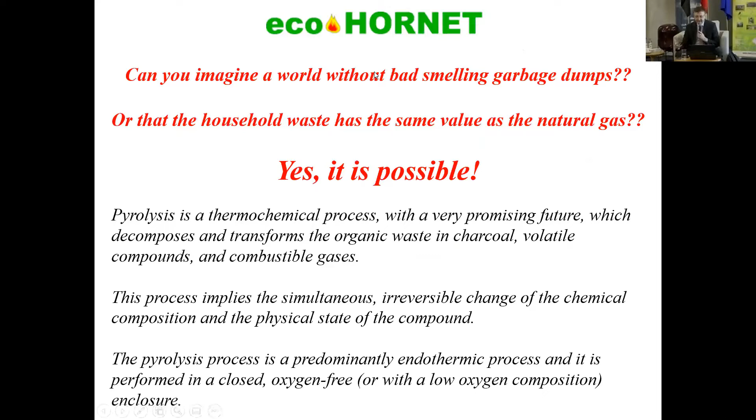So Mr. Hornets is an entrepreneur, but before that he's an inventor. He spent most of his time developing, engineering, and inventing new types of devices and systems. He was involved in the defense industry, and some of his patents are in this field. But after that, he started a business by himself, and together with his brother, he initiated activities dedicated to sustainable solutions. At present, after working so many years, he considers that he arrived at a mix of proper solutions for solving a very important problem of humanity, which means neutralization of waste.

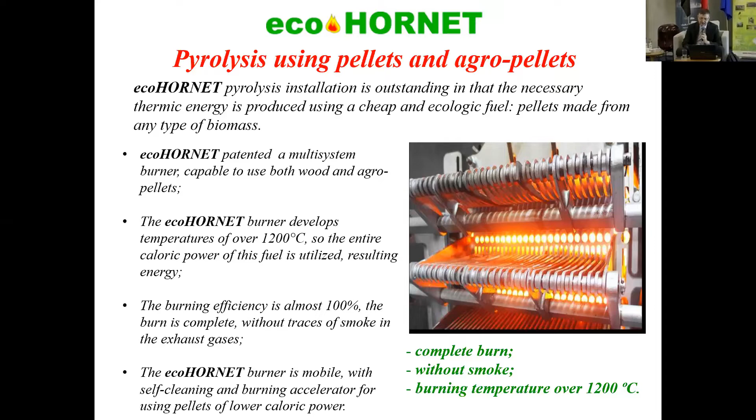So it is extremely important to mention that the core technology of this pyrolysis equipment is an in-house process of combustion of biomass using pelletized substrate that could work at very high temperature. Having the advantage of operating at very high temperature, there are many advantages regarding also the way in which the equipment could be shaped and used in different applications.

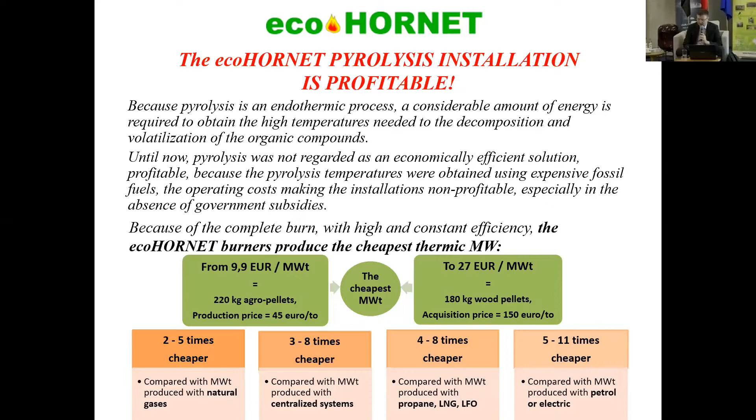So taking the advantage of working at high temperature, there are different other possibilities to operate this installation, either maximizing the gas fractions or maximizing the liquid fractions. And in this way, to have the possibility of shifting between different operating points.

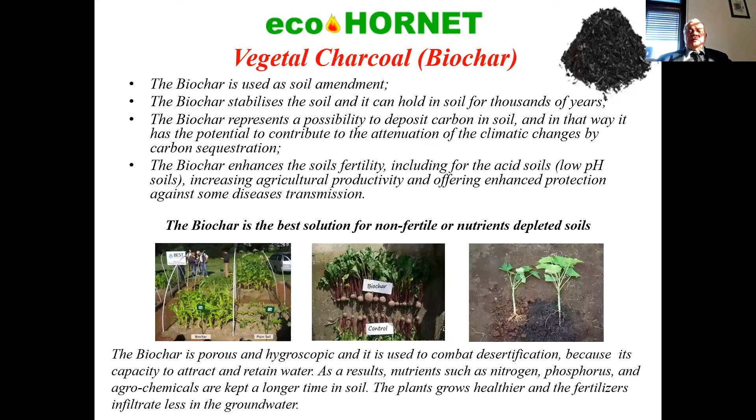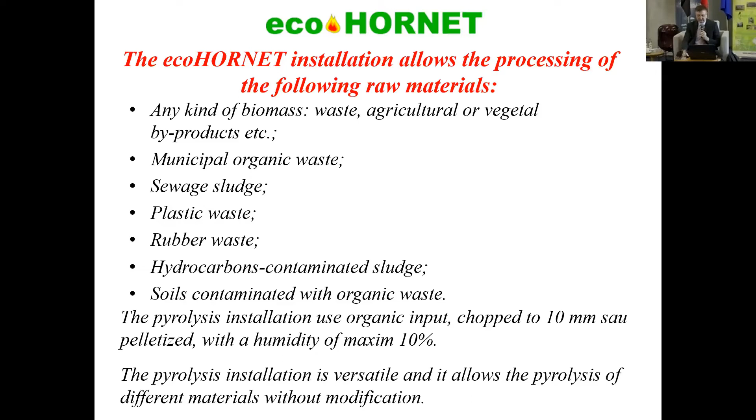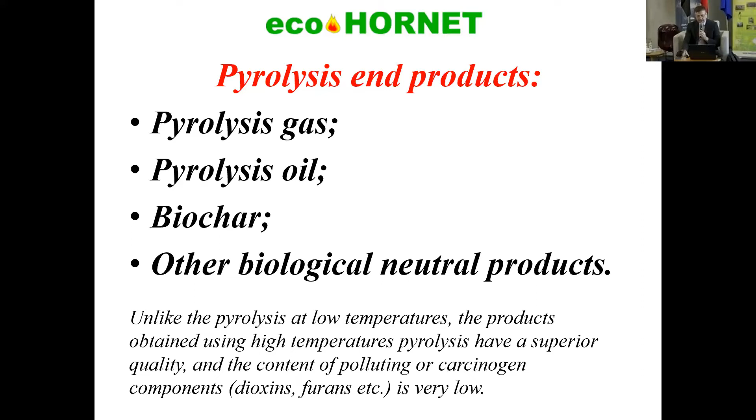Produsele principale sunt gazul de piroliză, uleiul de piroliză, din vegetale biocearul sau alte produse care sunt neutre biologic. Și aici avem negru de fum din cauciuc, avem coxul care nu mai este poluant, deci îl putem folosi în orice alt proces industrial. So in principle, we have the gas fraction, the liquid fraction, and the solid fraction that could be biochar, or in other conditions, you can have other types of carbon, like black carbon, or other products that are generally neutral from a biological point of view.

Calitatea acestor produse este diferită în raport de compoziția chimică a fiecărui produs pe care îl procesăm, de temperatura la care îl supunem în descompunere, de analiza chimică a acestui produs, de compoziția chimică a fiecărui produs, dar el poate fi reglat pentru că avem această marjă de reglare a temperaturii, a vitezei de tranzitare și a umidității. Toate compun valoarea sau calitatea, putem să ducem la cea mai înaltă calitate produsele obținute.

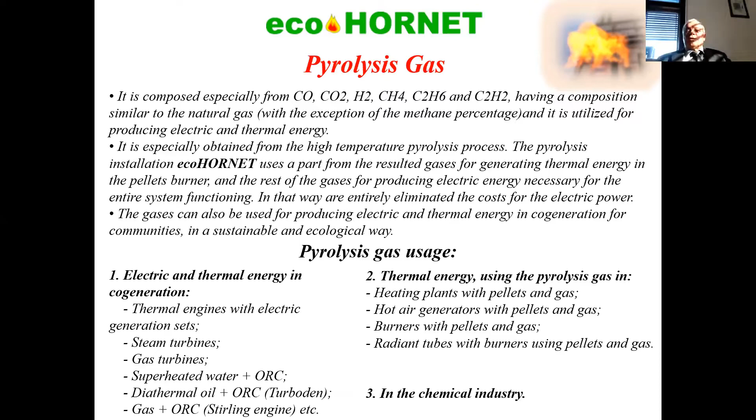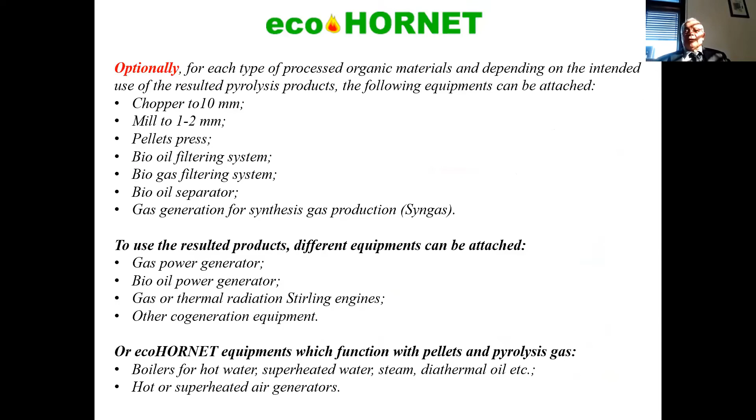În concluzie, pot să vă spun că este o instalație foarte calitativă. Este o instalație care are o mobilitate foarte bună și o putem folosi acolo unde avem nevoie. Este o instalație care poate fi modificată pe partea inițială pentru fiecare produs pe care vreau să-l procesez. Și calitatea cea mai bună a acestei instalații este că, tocate la 1 centimetru și cu temperatură și cu umiditate sub 10, primește orice fel de material în descompunere.

So I wanted to keep on display the layout of the unit manufactured by Mr. Hornets, mentioning that this layout has been tested for the types of applications mentioned. We want to present these aspects to start matching possible collaboration between the approach followed here in Romania with the technologies presented, and the possibility of building a bridge across Europe, to collaborate together and participate in projects not only in Europe, but worldwide. Thank you very much, Mr. Hornets.

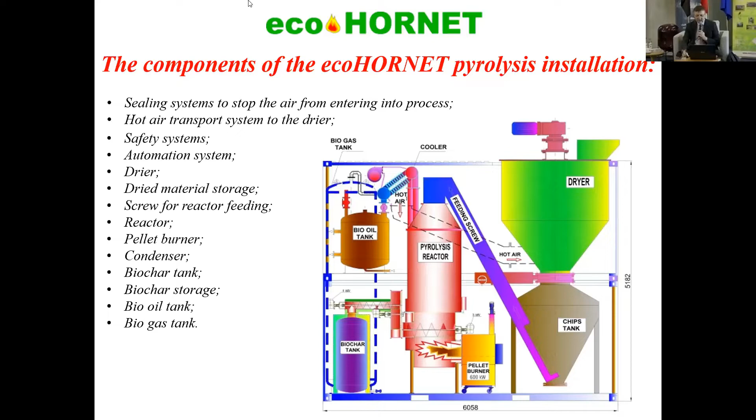I would like also to welcome some of the distinguished speakers that joined us meanwhile. Mr. Javier Navarro, welcome to this meeting, and we would like to thank you for the opportunity of being with us. If you look at the group of attendees, we also have important colleagues joining us from Romania, but not only. For instance, we have Stavros Kalognomos, joining us from Brussels. He is from the Conference of Peripheral Maritime Regions, and he is focusing particularly on the Balkan regions.

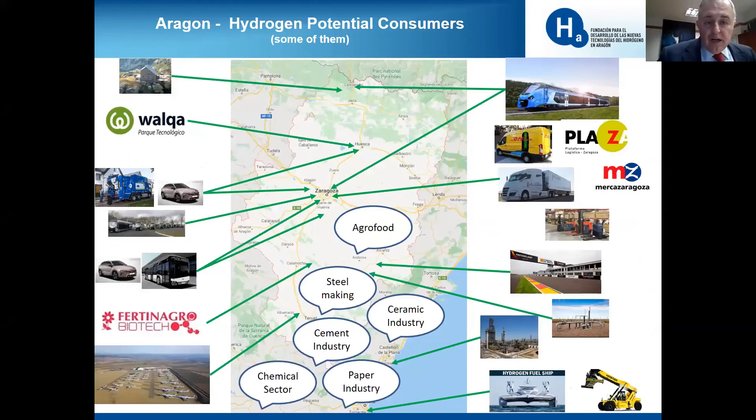You can see this is the composition of the foundation, but these companies are not the same as those. Many of the first companies are partners, shareholders of the Hydrogen Foundation, but here they represent less than 50% of the named companies, concrete companies that are in disposition to work, and have signed a letter of intentions to work on this important initiative.

Thank you very much, Mr. Navarro. Actually, I have to say obrigado. Thank you for this very nice presentation. It is a very fresh breath that is showing that the hydrogen technologies and the hydrogen economy has a very clear future based on this kind of approach. I would like to confess that during this week, being here in Dubai, and being amazed by the fantastic infrastructure, buildings, and everything that these people succeeded to have here, it is a kind of hope for the future of hydrogen.

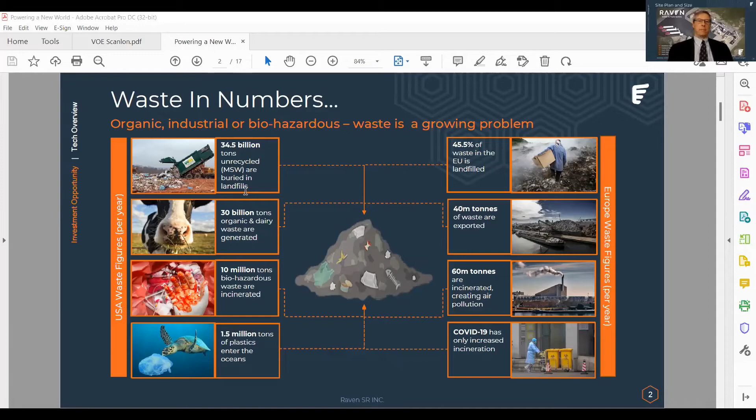Raven began several years ago under a technology under the name of Intellergy. So the technology has actually been commercialized for about 20 years. But as we moved into the renewable energy awareness and climate awareness, we've actually gained a lot more footing and strength. So just real briefly, I think we recognize waste is a massive problem, both in Europe and America. The amount of waste going into our landfills, the amount of waste going into our oceans and rivers, significant problems. And we see air pollutions, emissions. At the same time, we're seeing some very large markets that can be addressed, both aviation fuel, the hydrogen economy, solid waste handling. These are areas that are growing, and sadly, and we at the same time, from a perspective of a market, it's a great opportunity where you can marry both of them.

So briefly, I don't want to spend too much time on this because I'd like to focus more on others, but Raven SR has 12 patents, and we're currently increasing the number of our patents. One of the things that we like to point out is that we are truly a non-combustion technology. We do not use any air or oxygen in the process. It's been ruled by the California EPA as a non-incineration project.

That means that we avoid a lot of emissions and pollutants that are typical of anything involving combustion.

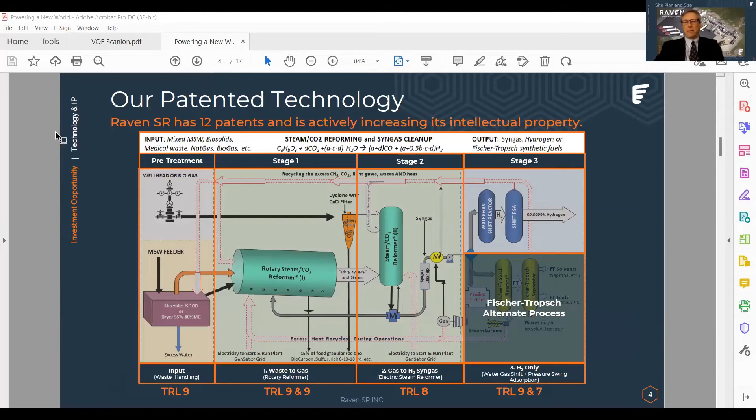And so this is, quite frankly, very unique. The fact that we could process, whether it be plastics or biogenic waste or mix or gas, and we consistently hit this quality of syngas, which is kind of where our patents and our intellectual property lies in getting to that syngas. And then from the syngas, as I pointed out in the slide previously, we can go into different kinds of fuels. Our patents cover the entire process. The stage 1 and stage 2 have particular chemistry that's going on the inside, but stage 3 could really be any third-party available technology that's out there.

Because we're non-combustion, we can actually get closer to urban areas. We've been working with the California Air Resource Board, and we have very good qualities so that, as a neighbor, we won't be causing too many problems for neighborhoods in the area. The system can go much larger. Our first stage reformer can go up to 300, 400 tons. So this is just a 70-ton system producing about 4,500 or 5,000 kilos of hydrogen, but we can go larger.

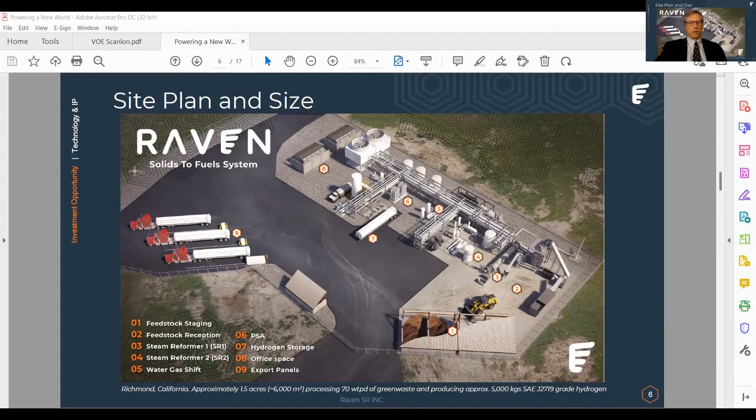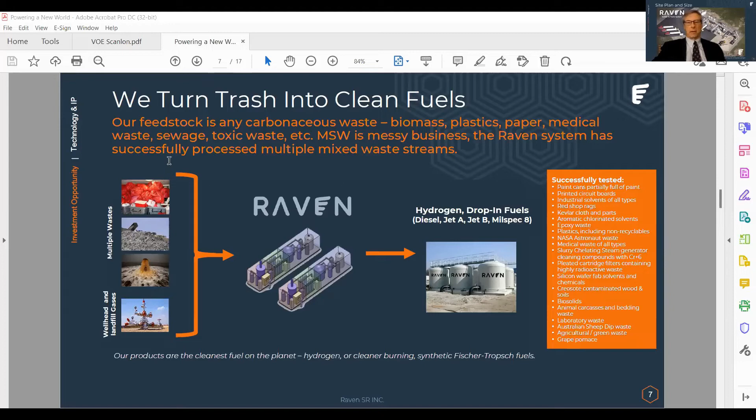The technology, as I mentioned at the beginning, has been around since the 1990s. We have successfully worked with multiple different kind of feedstocks. And again, we can convert different kind of a mix of feedstocks as wet as well. And that's generally how it arrives in a landfill, or most of our waste is wet. So we do not dry it prior to, we actually process it wet. And we've been involved in the decommissioning of 2 nuclear power reactors. We've run medical waste. So the opportunity of different kind of wastes obviously is significant, which, going back to my previous slide, it's a major problem. Waste is all around us, and at the same time, we want clean fuels.

As I point out here, we are not typical gasification. This is not combustion. There is no oxygen. There is therefore no carcinogens, no dioxins, no particulate matters.

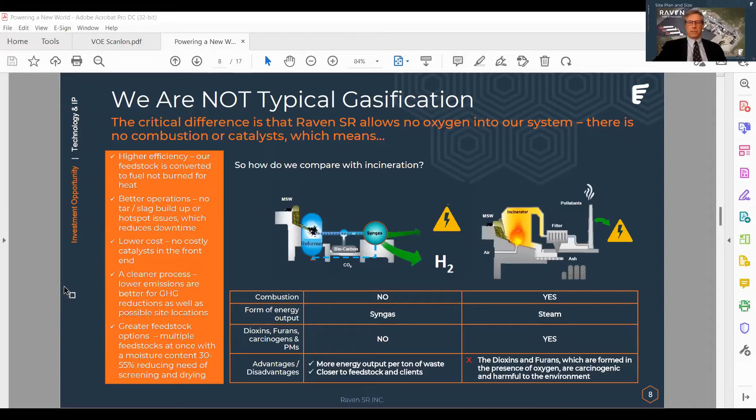We actually are producing more fuel per ton of input because we're not combusting it. So it operates at a lower cost, and we also don't use catalysts. We are designing the system to be self-powered and autonomous and independent of the grid, recognizing that electricity is a major problem around the world as well.

We can produce our own electricity. With one garbage truck of waste, we can actually produce enough hydrogen for 15 heavy duty hydrogen vehicles and provide our own electricity. Or if there is electricity, like renewable electricity, solar power, or another wonderful source nearby, one truck actually can produce enough fuel for 30 hydrogen trucks.

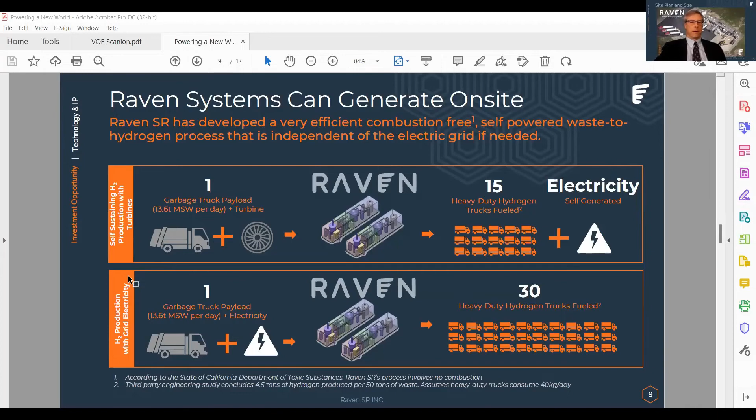So as a process, we like to say we're greener. Raven SR, we really don't like talking about the colors of hydrogen. We like to look at the carbon pathway, the carbon intensity. We actually use less electricity per kilogram than other methods. We also use no clean water. We are already processing the waste wet, so we're not adding water or using what I think is a precious resource in water.

We have fewer emissions, and we also help avoid emissions. By diverting landfill waste, especially organic waste from the landfills, we're actually avoiding additional CO2 emissions that would come off of that waste from the landfill. And then we're diverting waste, so we actually extend the life of a landfill. By processing that waste, rather than extending the use of land and getting additional permits, we can actually become, if you will, a bottomless pit that the waste goes in and hydrogen comes out.

We like to touch on this really always briefly. The popular definition of green hydrogen is often electrolysis, where you're taking electricity and breaking up the water molecule. But we like to point out that water is a precious resource, especially in certain parts of the world. They have problems of plastic and waste everywhere, but water is not. So we actually, as you can see by electrolysis, use less electricity, and we're also diverting organic waste as well as sequestering carbon, which electrolysis does not.

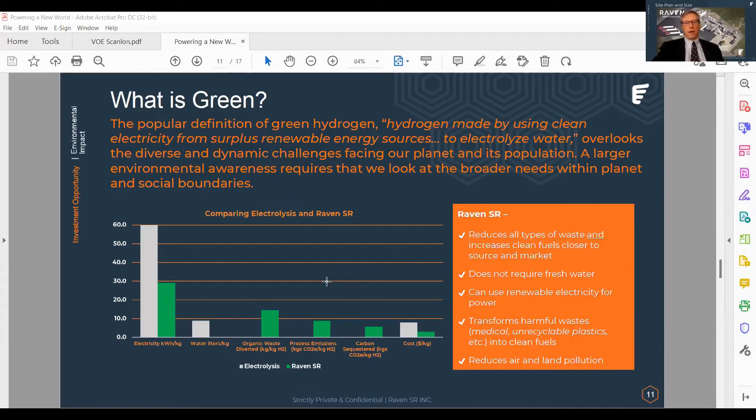So we think it's very important that as we look at the hydrogen economy, not only are we producing better fuels with fewer emissions, that have a lot more ability for electric vehicles and hydrogen vehicles, a system like Raven or other projects where we're actually taking the waste, we're solving two problems at once. Not only are we producing clean fuels, but we're cleaning up at the same time.

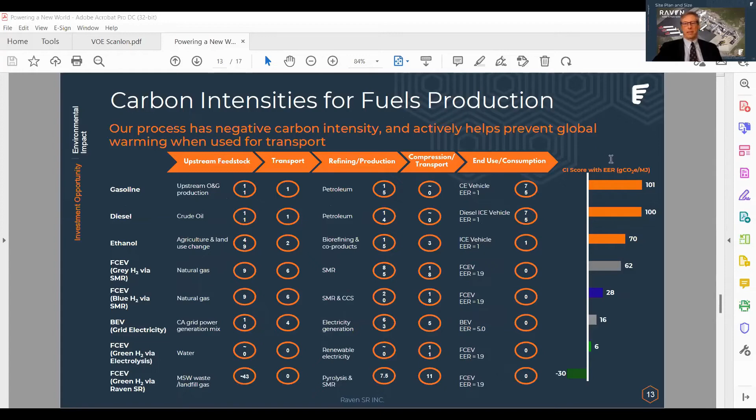And so for cities and urban economies where you have a lot of waste, plastic or biogenic, wood, cardboard, that can be converted in a really fast and clean way into clean fuels. And again, Raven, for example, can go to sustainable aviation fuel and methanol as well. Raven's technology actually produces a negative carbon intensity. So our fuel is actually a lower carbon intensity than even electrolysis and other fuels.

And right now, just as a brief introduction, which is wonderful that we have this opportunity, Raven has just created a Spanish corporation. We are going to be working with the Aragon region and the Aragon government. We are in discussions already with several of the other regions in Europe. Would love to have further conversations, but we are looking at deploying our systems in Europe in 2023, actually getting and working and building. We have several systems that are going into California and different parts of North America this year, but we are looking at getting going in Europe the following year.

So we have a lot of really good partners in Raven. We have a major Japanese trading house. We have a major American oil and gas company, as well as Hyzon. I always like to point out Hyzon Motors because it's a great partnership that we have with them that can produce the zero emission Class 8, Class 6 trucks.

And we have a really good partnership with them where they will actually help invest in projects if we can get fleets nearby. For example, in Spain, there is a lot of heavy truck usage. So this is a really wonderful partnership where not only can we take waste and convert it into clean fuel, but also through our partners provide some fleets that are important.